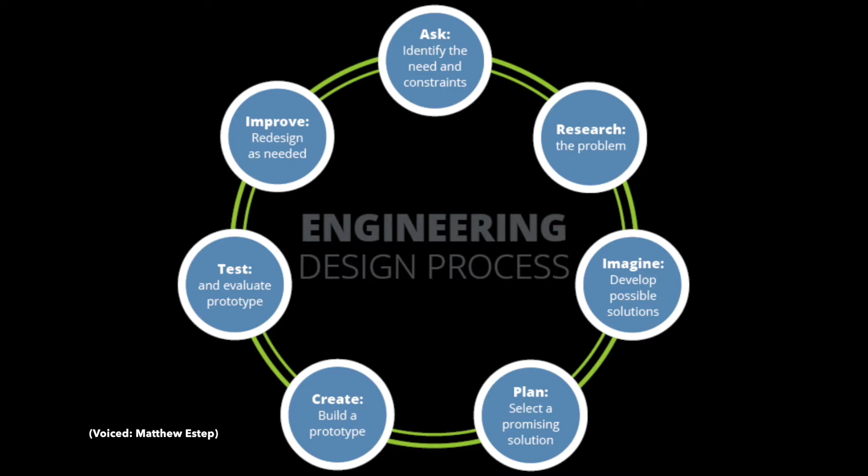We are the Trustworthy Bridge Builders, and our project was the Collapsible Bridge. Going into our project, we knew we would be following the design process, which begins with asking questions about goals and requirements and doing research.

The Collapsible Bridge project had numerous requirements and constraints dictating certain aspects of our build. The two main requirements were that the bridge must span 5 feet and hold a minimum of 60 pounds. The main constraints include the bridge must weigh no more than 5 pounds, it must fit within a 1-foot cubed box when disassembled, and it must be able to be assembled and disassembled in under 60 seconds.

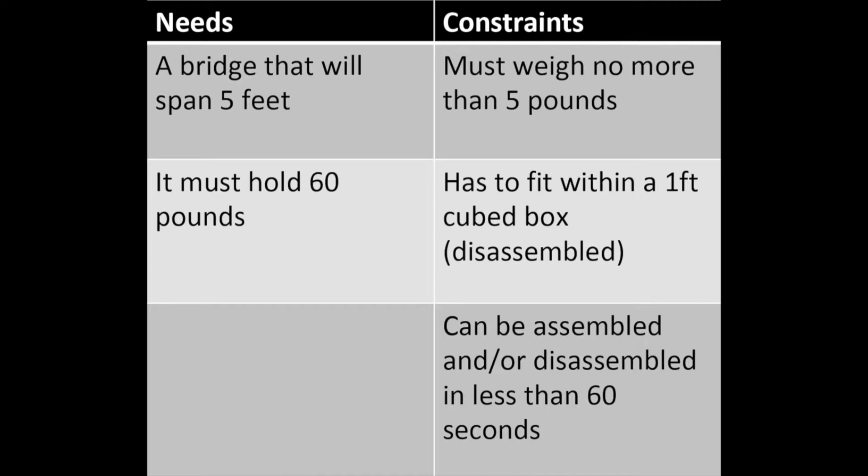There were also other miscellaneous restrictions that were less impactful, such as that it must be at least 1 inch wide and that PVC is not allowed. We initially looked into 3 bridge types: truss, arch, and cable stay. Truss bridges are effective when spanning shorter gaps, with the only contact with the surface being at each end. However, they require a larger volume of material than other designs, which may mean that the design is out of reach given our constraints. Arch bridges utilize the least amount of material.

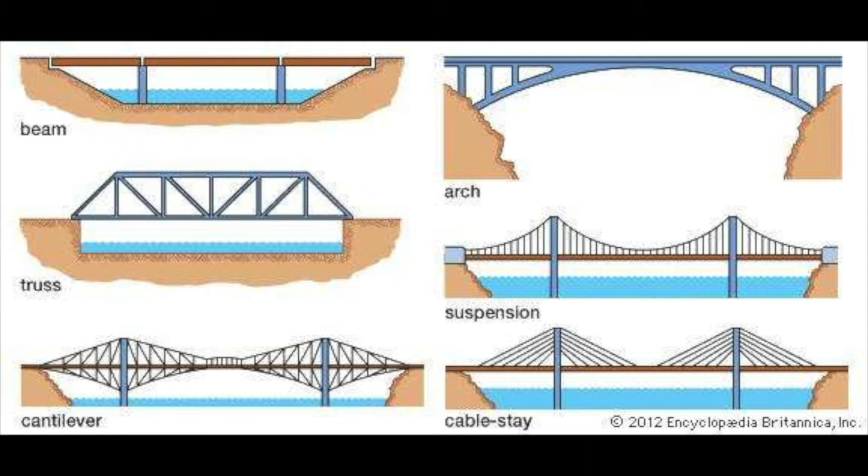However, when downward pressure is applied, it creates a significant amount of outward force. This can be troublesome due to our bridge being required to sit on top of 2 tables, solely supported at each end, as it can lead to the end sliding out, causing the bridge to collapse. Lastly, we looked at cable stay bridges, which use tension from wires suspended from towers to support the bridge.

We decided to use wood due to its good strength to weight ratio, and to make an arch bridge due to its low material requirement, combined with a wire connecting to the base of each side to counteract the outward pressure created by the arch. We also planned to use hinges to connect each of the pieces together, and we decided to start with 7 8-inch pieces with an 8-degree angle between each piece as an estimate.

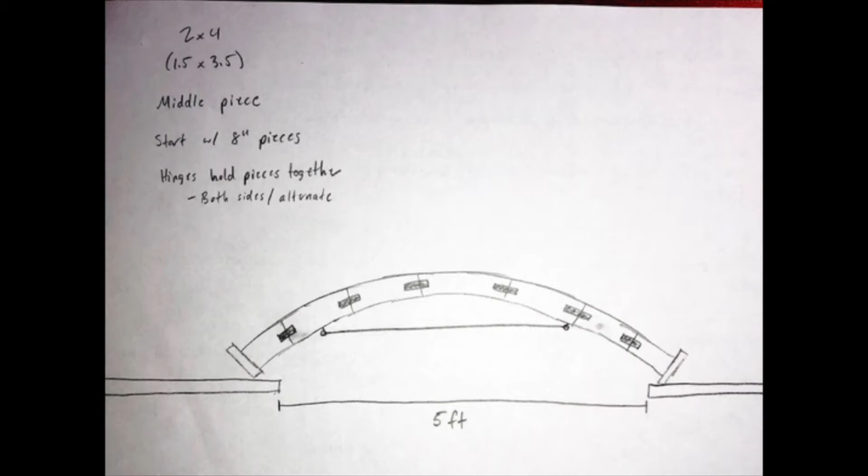We created a 3D model with our original estimates, which we then tweaked to find the optimal piece length and angle. After some testing, we decided on 7 10-inch pieces with a 10-degree angle between each piece. We also decided to use small wooden dowels inside of each piece to connect the pieces together rather than hinges, as it would help reduce weight and cut down on assembly time.

Here we used a miter saw to cut each of the 7 wood pieces to length, as well as ensuring each of the pieces were cut precisely at a 10-degree angle. We then lined up each of the pieces to ensure our cuts lined up properly. Lastly, we drilled holes in the end of each block of wood for the wooden dowels to get placed into. We used a metal stopper to ensure that the depth of the hole was perfect for the length of the dowel.

To test the strength of the bridge, we placed it on the ground and applied weight to the middle in the form of a push-up. After multiple tests to ensure it worked as intended, we then disassembled it to be weighed, which came out to be about 8 pounds. At this point, the only improvements left to make were to cut weight to reach the 5-pound maximum. This was done by drilling out the sides of the wood, making sure to not go all the way through in order to preserve as much structural integrity as possible. We continuously drilled, re-weighed, and retested the strength until our bridge weighed only 5 pounds.

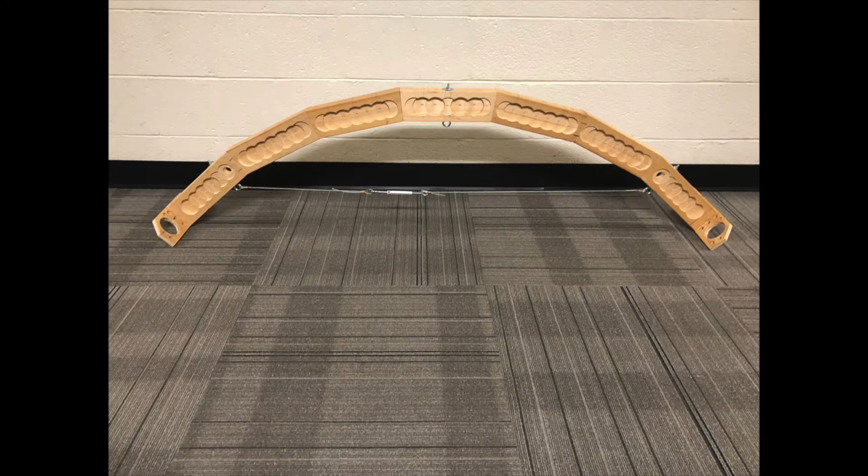After weeks of research, planning, and construction, we had a final product which met all of the requirements and constraints and performed exceptionally. On Fed Day, we placed 3rd in our session. We were one of 5 groups that held the maximum amount of weight, and the only wooden bridge to hold it all, without any assistance. It took around 20 seconds to set the bridge up, but if you include the time we spent adjusting the tension rod, we completed setup in 40 seconds.

If we had to redo our project, we would want to change the amount of time it took us to set up on competition day. We spent a lot of time adjusting the tension rod, and it wasn't really a waste of time, but we took twice as much time to set the bridge up than we really should have, which lowered the amount of points we could receive for that one category.

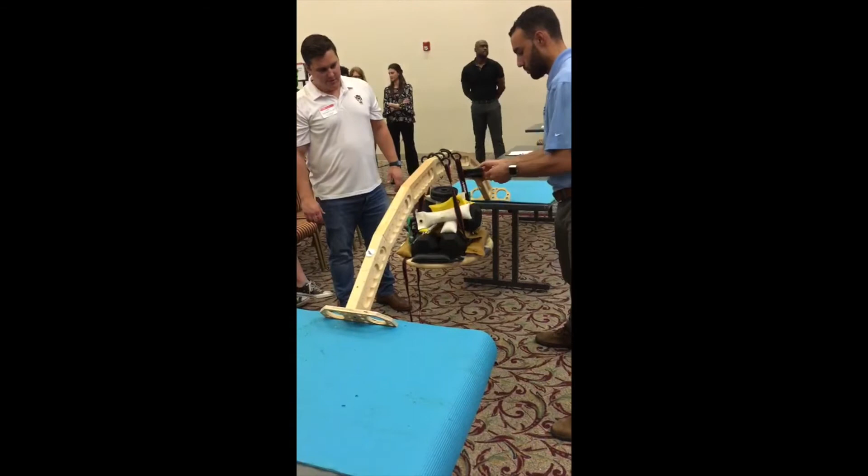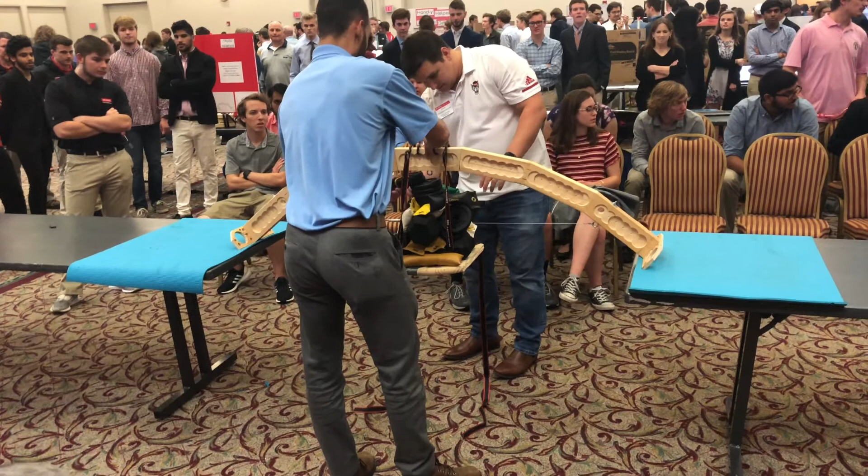In addition to this, we would have liked to have tried using different design methods that would have maximized the amount of weight our bridge held while minimizing the weight of the bridge. Additional points were given for bridges that weighed less than the 5-pound limit, so we shorted ourselves in this category by having a bridge that weighed exactly 5 pounds. So if we had the opportunity again, we would have liked to decrease the weight of our bridge even more than we did to meet the original requirement. When all was said and done, our bridge held 147 pounds, hands-free, without showing any signs of failure.

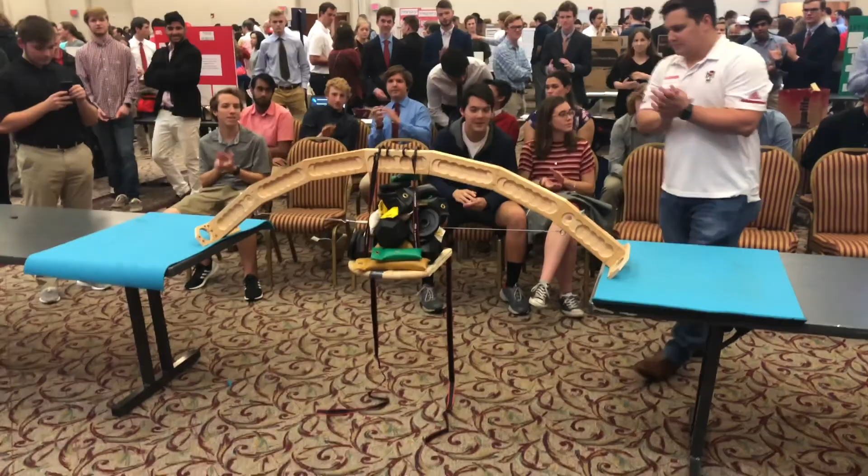Freshman advice from those at Trustworthy Bridge Builders. Things to do and not to do. Do not wait. Projects will take longer than anticipated due to unexpected problems, conflicting schedules with teammates, and other circumstances, so do not hesitate to start working early. You will thank yourself closer to Fed Day.

Additionally, take advantage of the resources made available to you, as they will help you tremendously. Such resources include the craft centers, maker spaces, and other workshops whose sole goal is to help students build things. Also take advantage of your specific project's guru. They know your projects inside and out, and they can help with ideas, concepts, what was effective in the past, and how good of ideas you already have.

Follow directions extremely carefully. Often the difference between placing and not is simply following directions and meeting all the requirements. The judges do pay attention to every small detail, no matter how unimportant it may seem to you at the time, and those details will affect their scoring of your project. For example, certain groups with the collapsible bridge did not consider several requirements, such as the 5-pound limit, and though their bridges succeeded and excelled at holding the weight, they were held off the podium for not meeting the requirements.

Enjoy Fed Day. Take time to walk around the McKimmon Center and admire the hard work and innovation of your classmates. It is very fulfilling to take in others' success, see ideas you hadn't thought of, and see the wide array of projects at Fed Day other than your own. Similarly, it is not all about winning. Sure, it's fun, but it's only a t-shirt. The experience and innovative environment surrounded by all your friends and future counterparts in the engineering field is much more important than your pride, so be sure to take it all in.